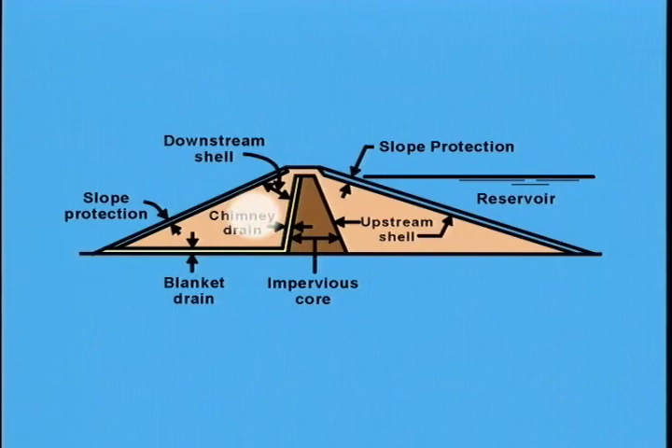Earth dams consist of the following components: slope protection on the upstream face, an upstream shell, an impervious zone, a chimney drain, a horizontal drainage blanket, a downstream shell, and downstream slope protection. In some embankment dams, the impervious zone of the dam extends practically to the upstream face of the dam. Such dams do not have a pervious upstream shell. The impervious zone would be covered by a filter layer and then a layer of slope protection.

Upon drawdown, the weight of the filter and the slope protection layers would increase from submerged weight to drained weight. This increase amounts to practically a doubling of the weight of these layers, and thereby a doubling of the tendency of the filter and slope protection layers to slide down the face of the impervious zone.

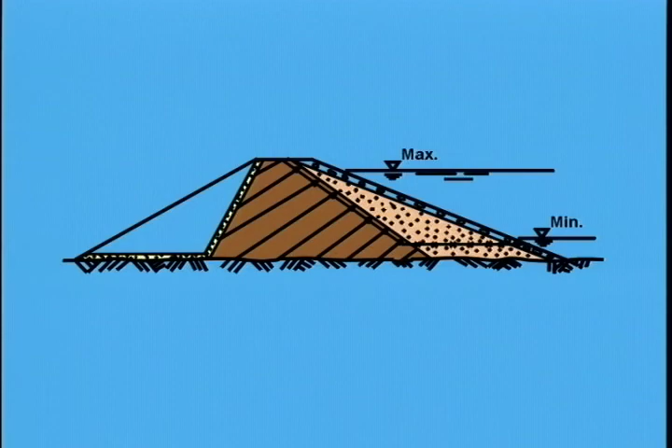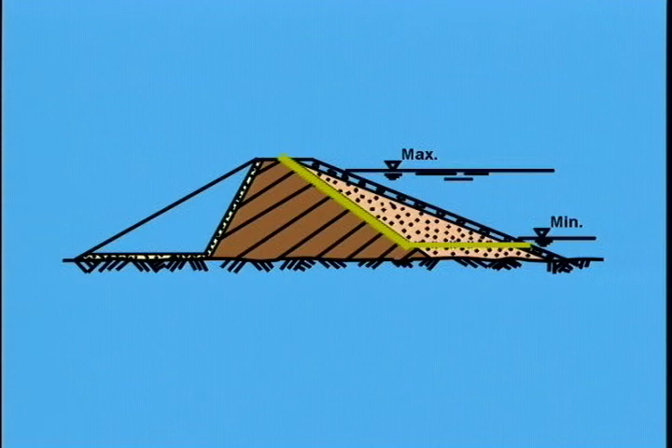Many embankment dams have a central impervious zone and an upstream relatively pervious shell. Again, the critical surface for sliding is just below the upstream face of the impervious zone. This is the location where the impervious zone experiences the lowest confining pressures during high reservoir level. The failure surface then extends as a low-angle plane through the upstream shell and slope protection.

If the upstream shell does not drain significantly, the driving force increases from that due to the submerged weight of the shell to that due to the saturated weight. If the upstream shell is free draining during drawdown, the driving force increases from that due to submerged weight to that due to drained weight of the shell. In both cases, practically a doubling of the driving force occurs.

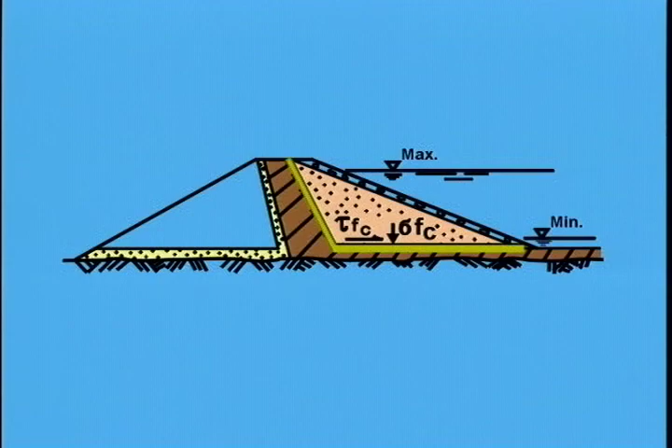If drainage of the upstream shell is still taking place at the end of drawdown, stability of the area of the upstream slope in the vicinity of the drawdown level of the reservoir, where water is seeping out of the upstream shell, should be evaluated. Occasionally, the impervious core of a dam is connected to an impervious upstream blanket. In this case, the critical surface for sliding extends upstream just below the surface of the upstream blanket.

In the case of seismic loading, instead of the increase in driving load being due to an increase in the unit weight of the material upstream of the impervious zone, the increased driving load, generally considered, is a horizontal load equal to the total weight of the upstream material times an appropriate horizontal earthquake acceleration. At times, a vertical load equal to the total weight of the upstream material times an appropriate vertical earthquake acceleration is considered to act concurrently.

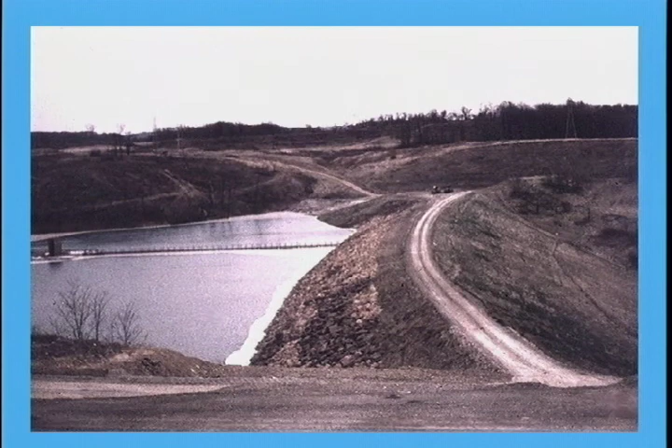There are plans to heighten Cardinal Fly Ash Retention Dam 2. This picture was taken of the existing dam from the right abutment. The fly ash pond is on the left. In the distance, the intake tower for the low-level outlet can be seen. The white floating material adjacent to the upstream face are tiny hollow glass spheres collected with the fly ash. The upstream slope of the dam is covered with rock slope protection, and the downstream slope with grass.

The crest of the dam is 200 feet above streambed. The dam has an upstream shell of clay mine spoil, an upstream sloping impervious core of clay, a transition zone of clay mine spoil, a chimney drain, and a downstream shell of clay mine spoil. The clay mine spoil is only slightly less plastic than the clay used for the core. The level of the reservoir at the time of heightening is expected to be elevation 903. The top seepage line is indicated on the cross-section for this elevation. The proposed cross-section for the heightening is shown here.

Roller compacted concrete is proposed for the upstream portion of the upstream slope and minimizes the amount of overlay required over the original downstream slope. The clay core and chimney drain are extended upward for the heightening. The downstream shell is overlain with mine spoil.

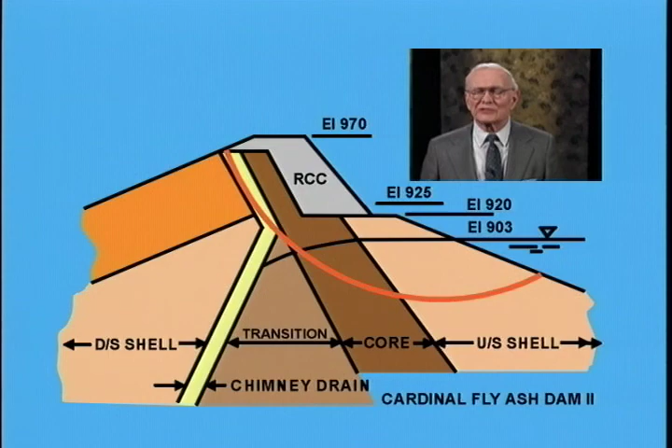In order to carry out stability analysis of a dam under any of the three rapid loading conditions, it is necessary to know the shear strength of the soil at all points along the failure surface being investigated. The preferred type of shear test is the triaxial test. In this test, a cylindrical specimen of soil is encased in a rubber membrane.

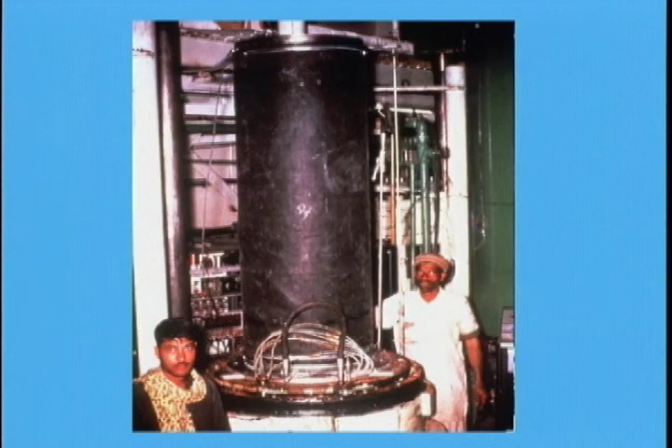material. The rubber membrane is attached to a pedestal at the base and a cap at the top. Both are equipped with porous stones to permit water to flow into or out of the specimen as desired during testing. Pore water pressure measuring devices were installed in the specimen. The leads to these devices are evident at the bottom of the specimen.

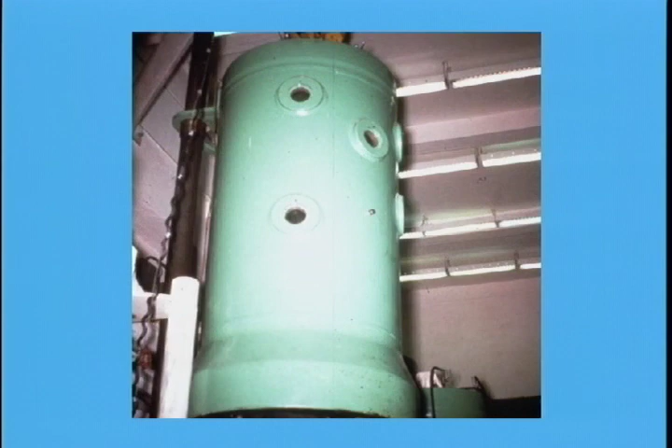A pressure chamber is put around the specimen for triaxial testing. An all-around pressure up to 470 pounds per square inch can be applied to the specimen in the chamber. Portholes were provided in the steel walls of the chamber so that the specimen could be observed during testing. A piston which passes through the top of the chamber is used to apply an axial load to the test specimen. The piston is not visible in the photograph.

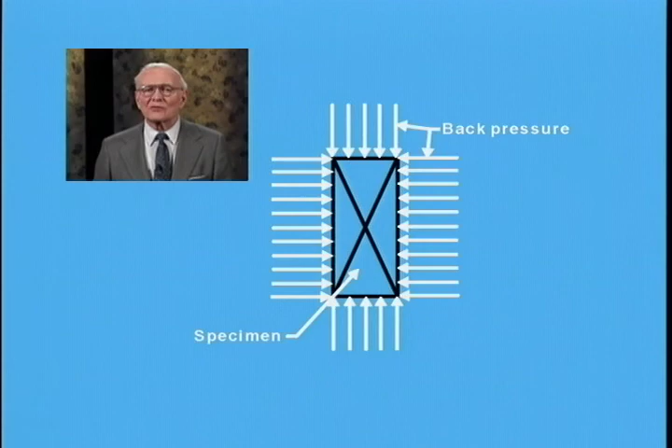For conservative representation of field conditions, test specimens must be fully saturated. To accomplish this, the chamber pressure and the pore water pressure in the specimen must be built up concurrently and at a slow rate. When a small increase in chamber pressure is reflected by an equal increase in pore water pressure, the specimen is considered to be 100% saturated. That is, no air bubbles are present in the pore water. Usually a chamber pressure of about 100 pounds per square inch is required to accomplish this fully saturated condition.

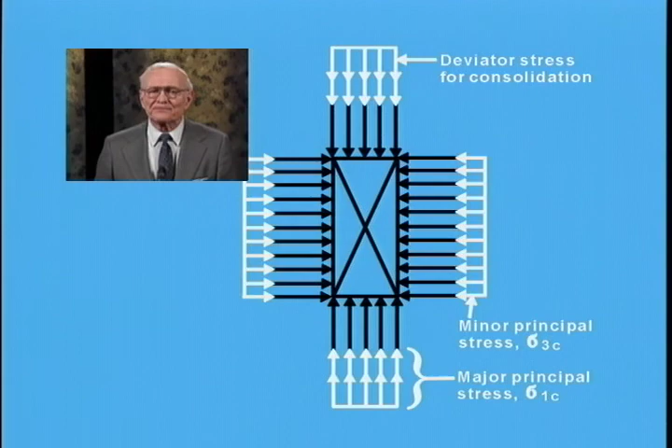Testing then proceeds by increasing the chamber pressure and applying a load to the piston to represent the desired major and minor principal stresses for consolidation. The stress imposed by the piston is termed the deviator stress. After consolidation, the deviator stress is increased to failure of the specimen without permitting any drainage. When the major principal stress is greater than the minor principal stress during consolidation, the test is termed anisotropically consolidated undrained triaxial test. The abbreviation is ACU.

When the major principal stress and minor principal stress are the same during consolidation, the specimen is isotropically consolidated. The abbreviation is CU for such a consolidated undrained test. Casagrande called the CU test an R test. Shear strength is determined by performing laboratory tests on representative samples of embankment material. These tests must be carried out so as to duplicate field conditions as closely as possible.

Before the rapid loading, the soil had come to equilibrium under the stresses which occur in the dam prior to the rapid loading. That is, it had been consolidated under these stresses. As an illustration, the major and minor principal stresses acting upon the critical failure surface for a central core dam with upstream impervious blanket at time of consolidation and immediately after rapid drawdown are shown here.

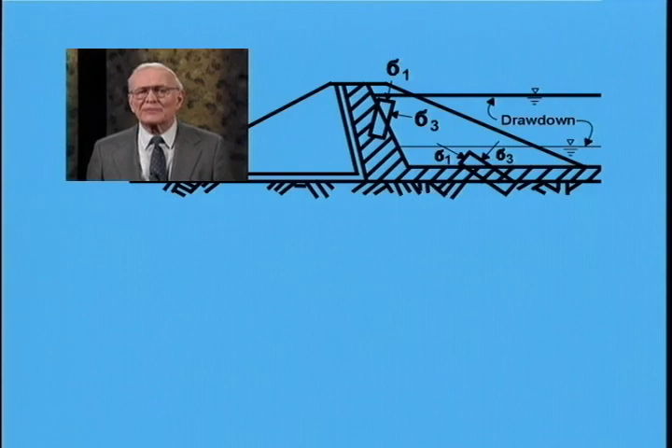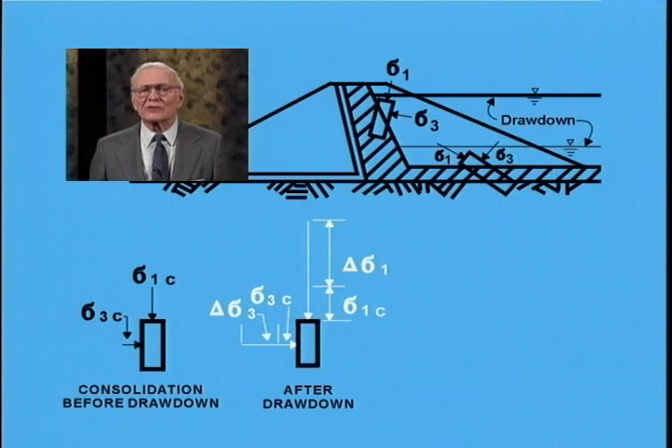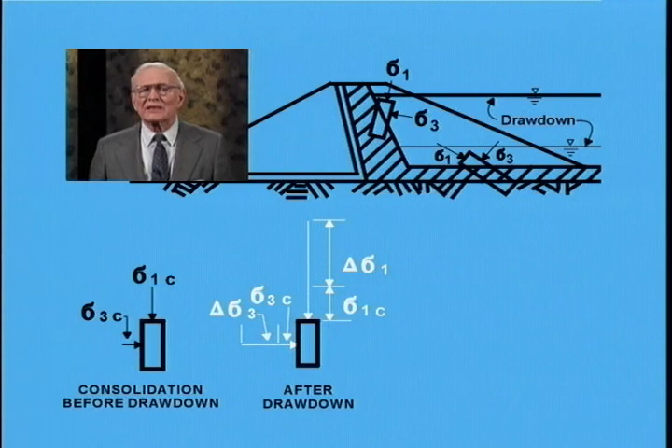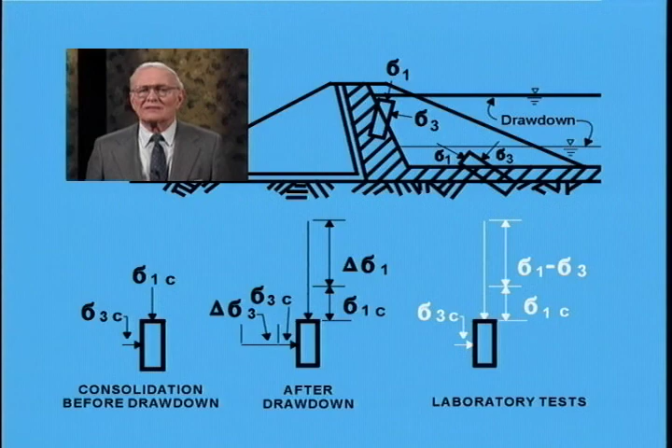The major and minor principal stresses before drawdown are indicated as sigma 1c and sigma 3c. After drawdown, both sigma 1c and sigma 3c increase to values about 2 times their values at the time of consolidation. The increase in sigma 3 merely adds to the back pressure in the laboratory testing. Since the applied back pressure has already resulted in 100% saturation of the test specimen, there is no need to increase the applied sigma 3 stress. Thus, the chamber pressure used for consolidation is not increased. The deviator stress, however, is increased until failure occurs.

For failure surfaces having a factor of safety of 1.5 to 2 before drawdown, the ratio of major principal stress at time of consolidation, sigma 1c, to minor principal stress, sigma 3c, usually has a magnitude of about 2. Because the driving force weight is about double during rapid drawdown, the major and minor principal stresses also about double.

A Mohr diagram is a convenient way to represent the stresses existing at a point on the failure surface in the field or in the laboratory triaxial test specimen. A typical Mohr diagram representing stresses at the time of consolidation is shown here. The Mohr diagram is a plot of shear stress as ordinate versus normal stress as the abscissa.

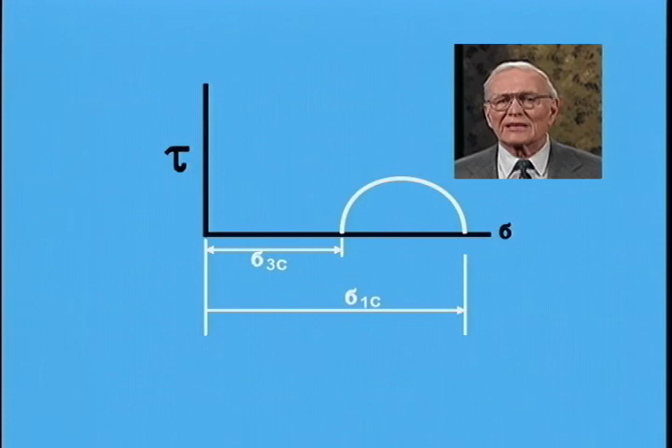The normal stress and the shear stress occurring at a point on the failure surface at time of consolidation can be obtained directly from a stability analysis for the condition before drawdown. The shear force on the failure surface at time of consolidation is designated as tau Fc and the corresponding normal force as sigma Fc. The obliquity of the resultant force on the failure surface is alpha.

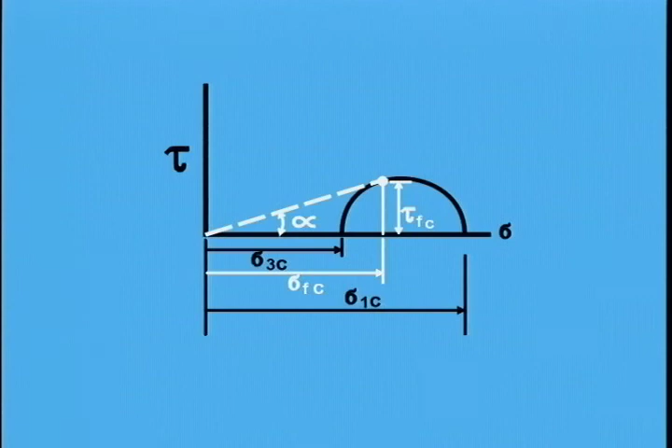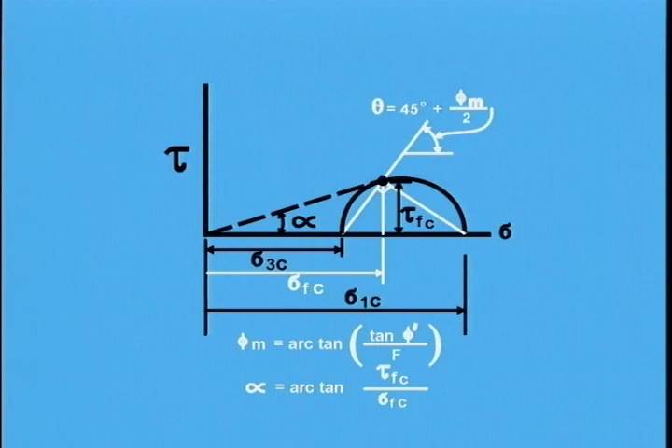From these two stresses and the friction angle mobilized at the time of failure, phi sub m, the major and minor principal stresses and their ratio can be determined. The mobilized friction angle is the arctan of the tangent of the effective friction angle, phi prime, divided by the factor of safety. The concept in limit equilibrium stability analysis is that if the shear strength of the soil is divided by the factor of safety, sliding along the failure surface is on the point of occurring.

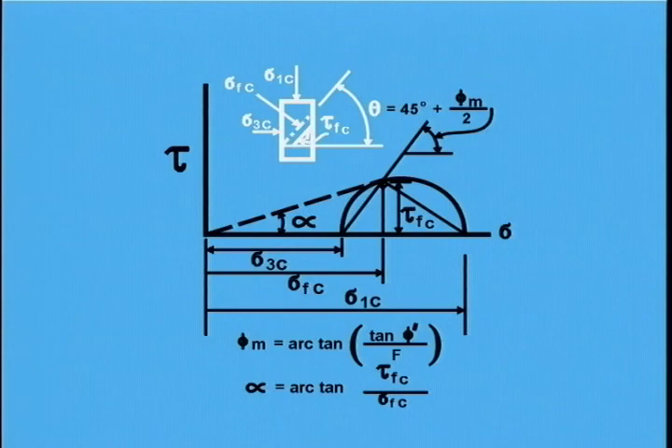The angle theta that the failure plane makes with the major principal stress plane can then be computed as 45 degrees plus phi sub m over 2. This angle is shown on the sketch of a test specimen. And on a Mohr diagram, knowing phi, the major and minor principal stresses can be computed using the geometry of the Mohr diagram. The lines from the plotted point of tau Fc to the major and minor principal stress points form a right angle with each other.

The resulting formula for the ratio of major principal stress to minor principal stress is as follows. K sub c, defined as sigma 1c over sigma 3c, can be computed from the formula 1 plus 2 tan alpha over sine 2 theta, divided by 1 minus tan alpha divided by tan theta. Alpha in this case is equal to the arctan of tau Fc divided by sigma Fc.

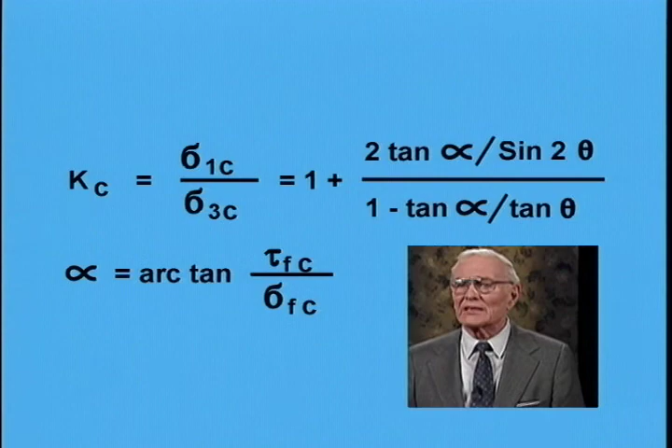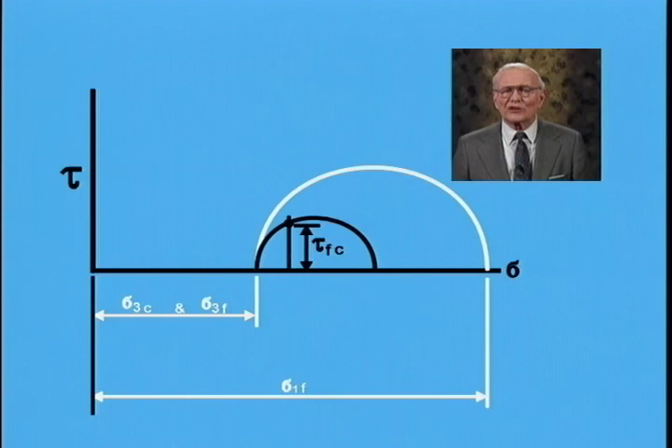The Mohr circles representing the consolidation stresses and the failure stresses from a typical anisotropically consolidated triaxial test are shown here. The shear and normal stresses on the failure plane at time of consolidation are tau Fc and sigma Fc. The major and minor principal stresses corresponding to these shear and normal stresses are sigma 1c and sigma 3c. The total major and minor principal stresses at the time of failure are shown as sigma 1f and sigma 3f.

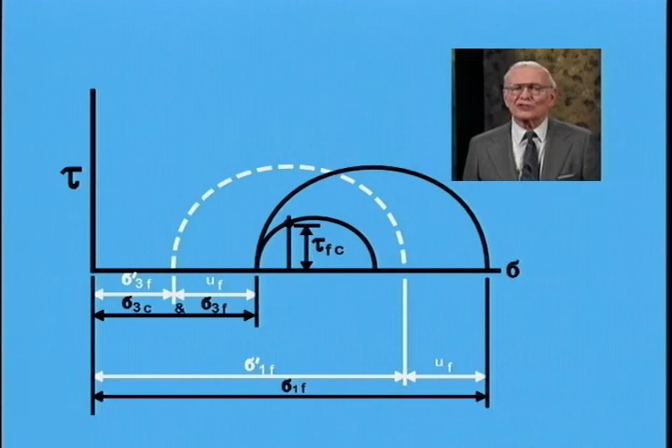The pore water pressure, which develops in the specimen during loading to failure, is uf. The intergranular or effective stresses in the specimen at failure are sigma 1f prime equals sigma 1f minus uf, and sigma 3f prime equals sigma 3f minus uf. The failure circle for effective stresses is shown by the dash line. The point where the effective stress circle is tangent to the effective friction angle is the shear strength of the material at failure.

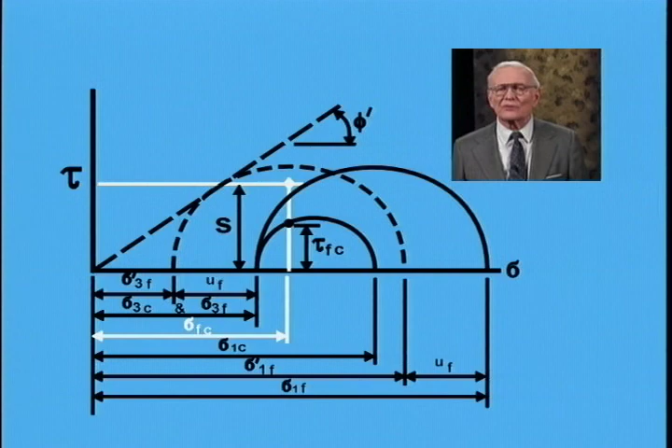Since the normal stress on the failure plane at the time of consolidation, sigma Fc, is known from the stability analysis before drawdown, it is convenient to plot the shear strengths against this normal stress. This is the circled point on the diagram. A positive pore pressure, indicated as uf, developed during the testing to failure.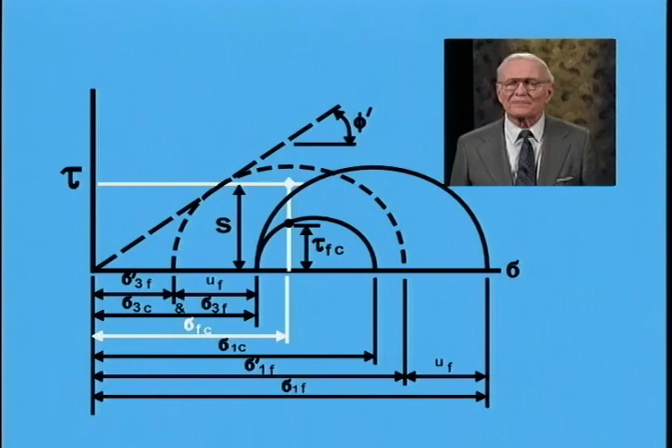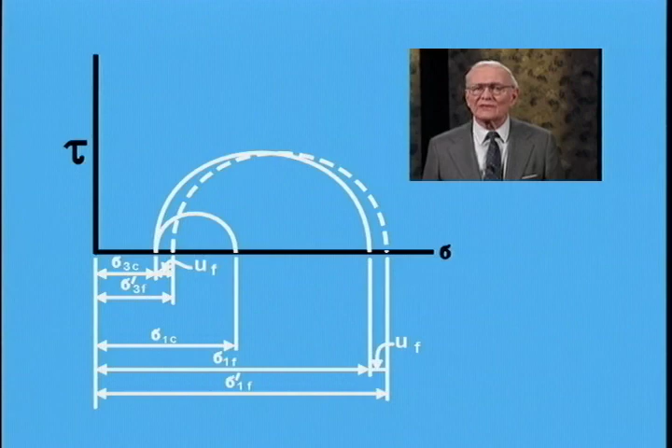Similar Mohr circles for a test specimen at smaller consolidation stresses are shown here. The circle for consolidation and the total and effective stress circles at failure are shown. In contrast to the previous test, the pore water pressure which developed during testing to failure, however, was negative or tensile. The tensile pore water pressure moves the effective Mohr circle to the right. The circled point represents the shear strength plotted against the normal stress on the failure plane at the time of consolidation, sigma Fc.

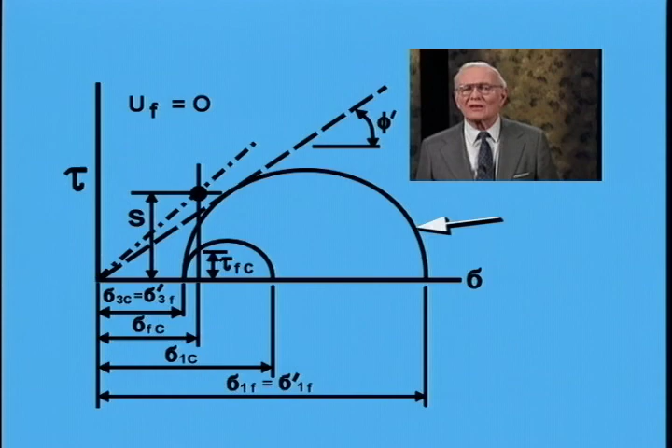A case where zero pore water pressure occurs at failure is shown here, where the total and effective circles at failure are identical. Also, the minor principal stress at consolidation, sigma 3c, is the same as the minor effective principal stress at failure, sigma 3f. The objective of these tests has been to determine a relationship between undrained shear strength S and normal stress on the failure plane at the time of consolidation, sigma Fc. The value of this normal stress is obtained directly from the stability analysis made for the before drawdown condition.

One other condition must be known as well. That condition is the ratio of the major and minor principal stresses at the time of consolidation, K sub C. Usually this ratio is about 2.

The design curve for determining the shear strength values to use in the after drawdown stability analysis consists of 2 straight lines. For higher sigma F sub C values, where positive pore pressures occur at failure, the actual laboratory test results are used as indicated by the line labeled K sub C equals 2. Where tensile pore water pressure occurs at failure, the strength is reduced to that consistent with 0 pore water pressure. It does not seem reasonable to rely on soil strength developed due to tensile pore water pressure.

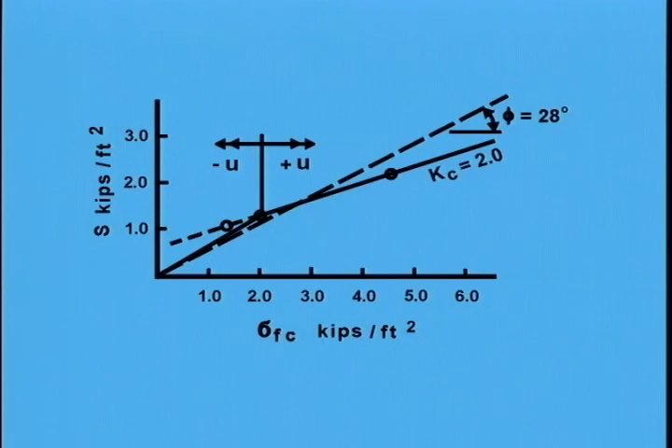All pore water has gas dissolved in it. If tensile pore water pressure or a significant reduction in compressive pore water pressure occurs, gas probably will come out of solution and effectively destroy any strength attributed to the tensile pore water pressure.

Although this K sub C ratio is usually about 2, it is convenient to have test results for other K sub C ratios so that the results for various K sub C ratios can be determined by interpolation. Usually, isotropically consolidated undrained triaxial shear tests, CU tests, are also performed. For purposes of interpolation, it is necessary to plot the results of such CU tests in the same manner as that just described for an anisotropically consolidated ACU test. An example of such plotting is shown here.

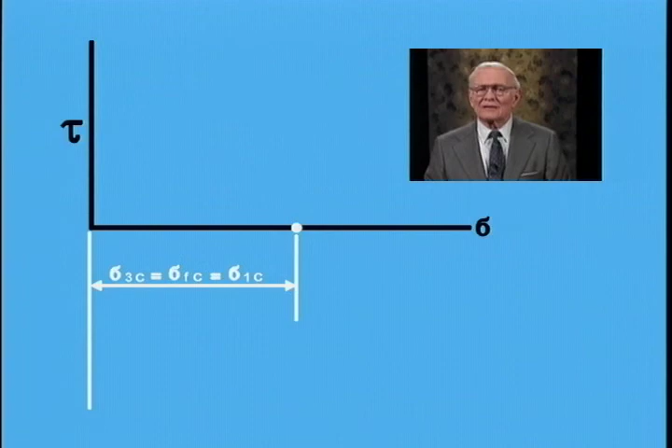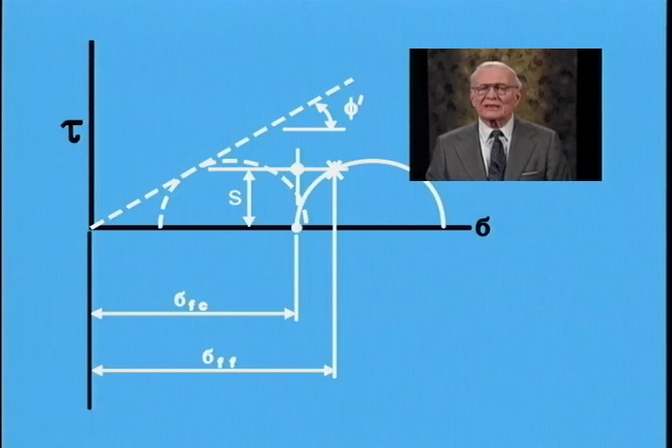Under isotropic consolidation, sigma 1c equals sigma FC equals sigma 3c. The total stresses at failure are shown by the solid line circle, and the effective stresses at failure by the dashed line circle. The shear strength is plotted against the normal stress on the failure plane at the time of consolidation, sigma FC. This is in contrast to the usual procedure of plotting the shear strength against the total normal stress on the failure plane at the time of failure, sigma FF, marked by X on the drawing.

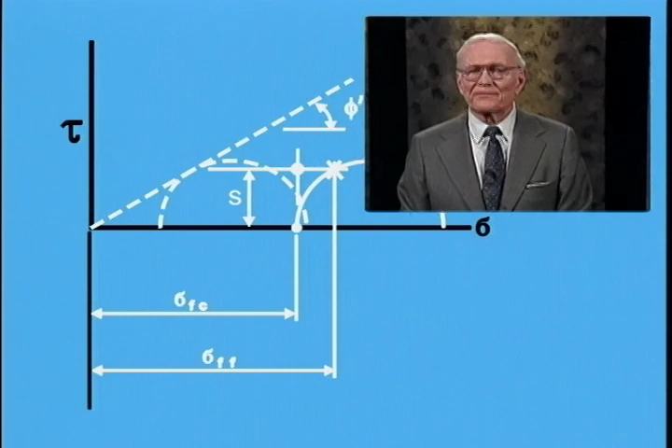The undrained shear strength of a soil is directly dependent upon the normal stress on the failure plane and the ratio of major to minor principal stresses at the time of consolidation. It is a consistent and logical way to define the shear strength.

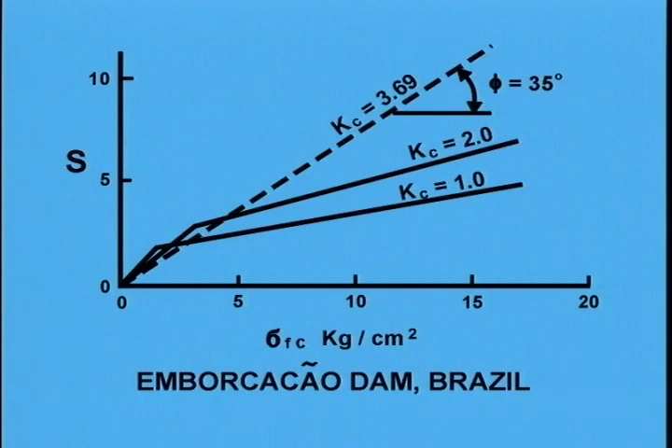K sub C values for actual cases generally fall in the range of 1.7 to 2.3. Strength values for K sub C values somewhat above and somewhat below K sub C equal 2 can be determined by interpolation with the K sub C equal 1 and the K sub C equal 3.69 lines. It is recommended that the shear strengths used to prepare the above-mentioned plots of strength versus normal stress on the failure plane at time of consolidation be strength obtained at 15% strain in the triaxial tests.

Sometimes a higher, that is, a peak value, occurs at a much lower percentage strain. Since the limit equilibrium stability analysis assumes that the entire failure surface is at the point of failure, the use of the shear strength at 15% strain appears more reasonable than use of a peak value. When the toe of the failure surface experiences enough strain to be at the point of failure, the upper part of the surface will have experienced much more strain due to deformation of the sliding mass. Also, if a peak value were to be used, one would have to be sure that the structure of the soil in the test specimen was truly representative of the structure of the soil in the dam.

Thus far, we have talked about anisotropically consolidated undrained triaxial tests. Another type of anisotropy is the possible difference in shear strength characteristics in the horizontal direction in the core of the dam in the field as compared to its strength characteristics in the vertical direction. Generally, this possible anisotropy, which could result from construction, is neglected.

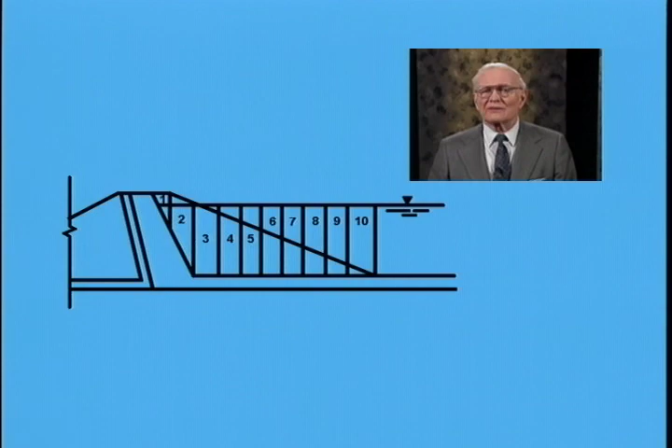The limit equilibrium analysis is generally carried out by the method of slices. The sliding mass is divided into a series of vertical slices as shown here. Usually 10 to 15 slices are sufficient. The forces acting on each slice are determined by a trial and error procedure. The forces acting on the two end slices, slice 1 and slice 10, and on a typical central slice are shown here.

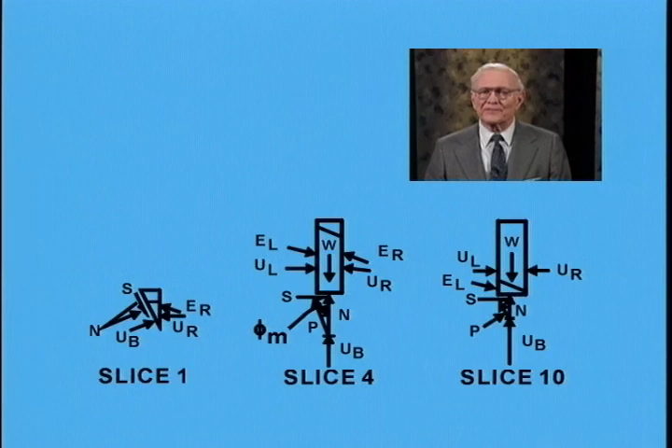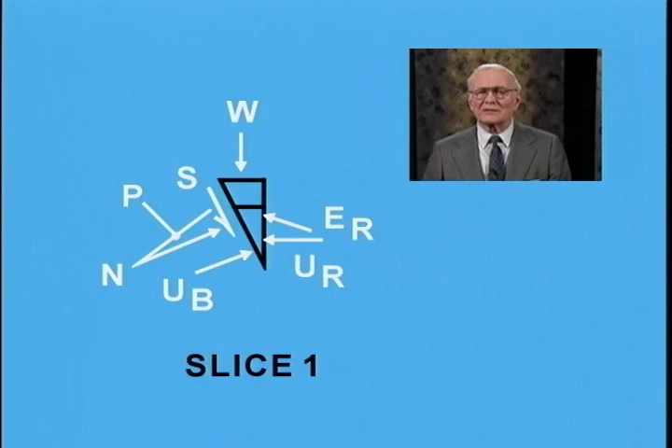The forces for slice 1 are the total weight of the slice, W, the water force on the right-hand side of the slice, UR, the water force on the bottom of the slice, UB, the normal earth force on the bottom of the slice, N, the shear force on the bottom of the slice, S, and finally, the earth force on the right-hand side of the slice, ER.

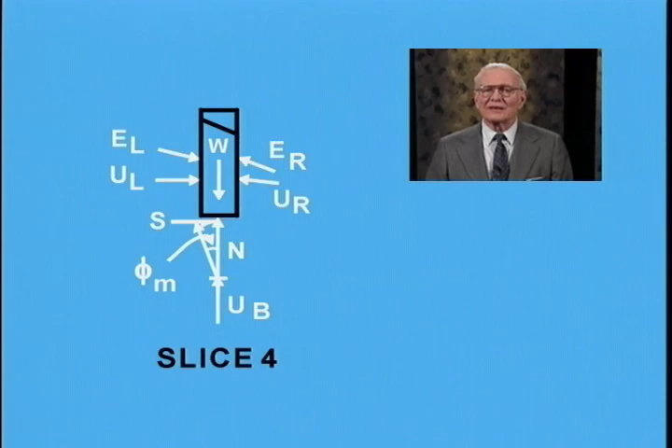Similar forces, W, UL, UR, UB, N, S, EL, and ER occur in slice 4. Water forces and earth forces occur on both the left-hand and the right-hand sides of the slice. Slice 10 has no right-hand side and thus no ER. These forces can be analyzed by constructing a force polygon for each slice. Such a polygon for slice 4 is shown.

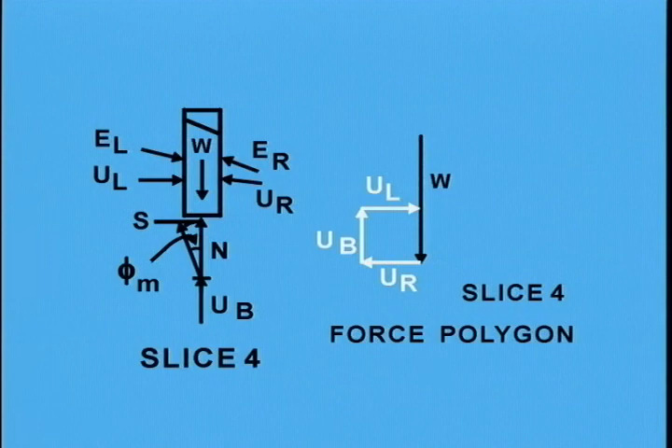The total weight of the slice is drawn. When the water forces on the left-hand and right-hand sides and on the bottom are added, the remaining portion of the weight force is the submerged weight. If drawing the force polygon starting at slice 1, then the left-hand side earth force will be known and can be drawn. The direction of the P force makes an angle of phi sub m with the normal or perpendicular direction to the base of the slice. Phi sub m is the mobilized friction angle.

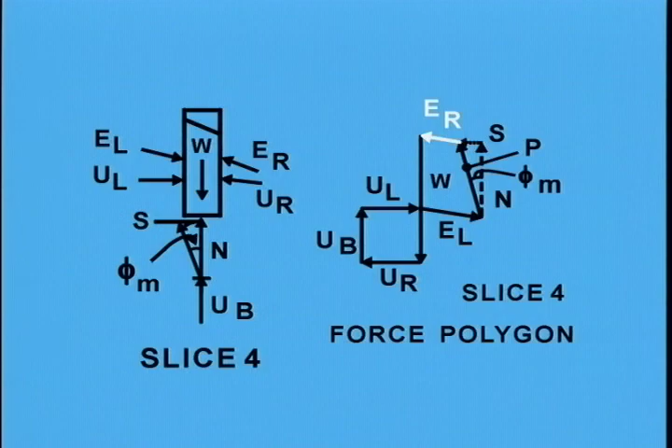A line in this direction can be drawn from the end of the E sub L force. A direction for the E right force is assumed, and a line in that direction is drawn from the top of the weight force. The intersection of P and E right closes the polygon. E right then becomes the E left for slice 5. A closed polygon for the slice indicates that the sum of the vertical components of forces on the slice adds up to 0, and that the sum of the horizontal components of the forces on the slice also adds up to 0.

The two assumptions made are the direction of the earth forces on the sides of the slice and the factor of safety. The factor of safety F determines the obliquity of the earth force on the base, phi sub m. For the polygon shown, the shear strength on the base was assumed to be due entirely to friction. If part of the shear strength on the base is due to cohesion, an additional shear force equal to the unit cohesion times the length of the base of the slice and divided by the factor of safety should be added to the frictional shear force shown in the polygon.

The check as to whether the assumed factor of safety is the correct one for the sliding mass consists in seeing whether, when the equal but opposite force to the lateral earth force determined for the right side of slice 9 is applied to the left side of slice 10, it causes closure of the polygon for slice 10. In this connection, it is convenient to plot the force polygons for the 10 slices so that the earth forces on the sides of the slices overlap. For example, the earth force on the right-hand side of slice 3 is equal and opposite to that on the left-hand side of slice 4.

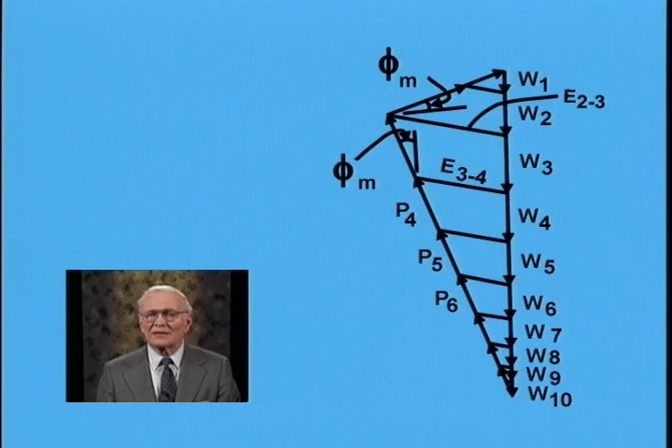A drawing showing the overlapping of the force polygons for the 10 slices is shown here. In this case, the force polygon for slice 10 closes perfectly, and therefore the assumed factor of safety for this particular set of polygons is the correct factor of safety. A different factor of safety will result if different assumptions are made regarding the earth forces on the sides of the slices. The direction assumed for these forces may vary from horizontal to an obliquity definitely less than the obliquity which would occur should sliding failure take place on the sides of the slices.

The obliquity may be assumed to be the same on all the interfaces between the slices, or it may be assumed to vary from interface to interface. An example developed by GeoSlope International shows how the factor of safety varies with a consistent obliquity assumed for all the interfaces. The abscissa scale is the tangent of the assumed obliquity. The corresponding obliquity angle is given also. The ordinate scale is the factor of safety.

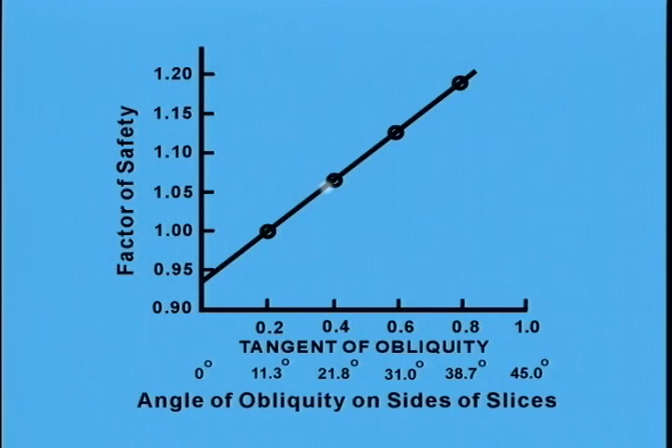For 0 degrees obliquity, that is a horizontal earth force on the sides of the slices, the factor of safety is 0.93, and for an obliquity of 38.7 degrees, it is 1.18. Generally, an obliquity of about 22 degrees would be reasonable. The factor of safety at this obliquity is 1.06.

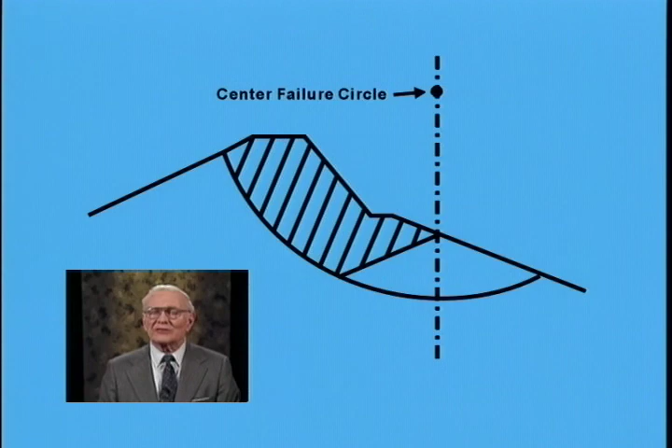Earth forces on the sides of the slices are absolutely necessary in order that full shear resistance be developed along the entire failure surface. The driving moment causing a stability failure comes from the weight of the material overlying the upper part of the failure surface, the shaded areas on the drawing. There is no net driving moment for the unshaded part of the sliding mass. The moments of the areas on either side of a vertical line dropped from the center of the circle balance each other. The earth forces on the sides of the slices modify the earth forces on the bases of the slices, so that every part of the sliding surface carries its fair share of the load.

Full equilibrium of each slice requires that the sum of the horizontal components of the forces equals 0, the sum of the vertical components of the forces equals 0, and the sum of the moments of the forces equals 0. In the solution by force polygons previously described, only the sum of horizontal components and the sum of vertical components equals 0. Alternatively, the slices method of analysis can be carried out so that the sum of the moments and the sum of the vertical components both equal 0.

If this is done, then a different relationship between factor of safety, F sub m, and the obliquity of earth forces on the sides of the slices is obtained. A graph of such a relationship is shown by this dashed line. For comparison, the factor of safety determined by the force polygon method, F sub f, is shown by the solid line. Obviously, there is very much less variation of the moment factor of safety with obliquity of the earth forces on the sides of the slices than variation of the force factor of safety with obliquity.

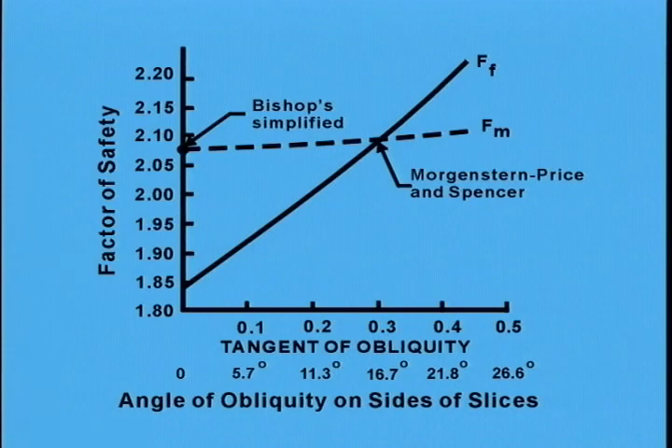Bishop's method, however, only applies to circular failure surfaces, while the other two methods can be used for failure surfaces of irregular shape. In the Morgenstern, Price, and Spencer methods, if a composite failure surface is used, a circle may be used to approximate the surface, and the center of this circle used for the point about which moments are summed. This completes my discussion of how I think stability analyses for the rapid drawdown case and the other rapid loading cases should be carried out.

Let me summarize the main points. Rapid loading type of stability analysis is required when saturated soils in an embankment have come to equilibrium and are fully consolidated under conditions prevailing before the rapid loading, and then cannot drain to any significant amount during the rapid loading. Rapid loading cases occur for seismic loading, rapid drawdown of the reservoir, and rapid heightening of a dam.

Immediately before the application of rapid loadings, the soil along this critical sliding surface is consolidated under anisotropic stress conditions. That is, the major principal stress is greater than the minor principal stress. The ratio of major to minor principal stress usually is about 1.8 to 2. Standard triaxial tests, where all around equal pressures are used for consolidation, are not suitable. To properly determine the shear strength of the soil on the failure surface at the time of rapid loading, anisotropically consolidated triaxial ACU tests are required.